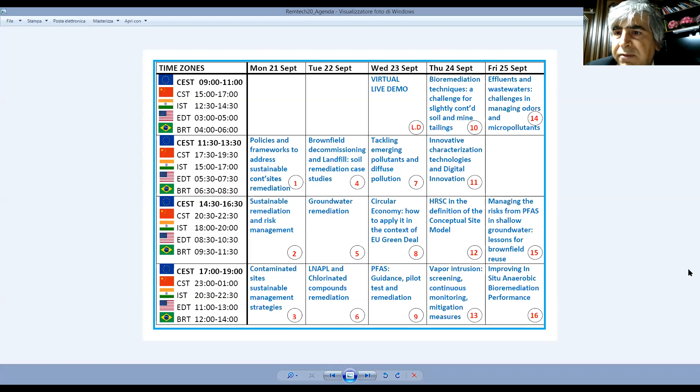Mute all, yes. Is it now muted? No, I still want to. Frank, you are mute too, you have to activate your microphone. Frank? Can you hear me now? Okay, okay, yes it's okay. Okay, I start over again.

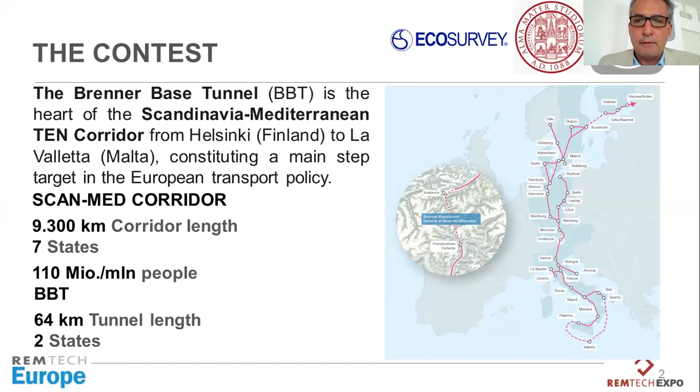The Brenner Base Tunnel is going to be the longest railway tunnel in the world with 64-kilometer length. It will connect Innsbruck in Austria with Fortezza in Italy, and is part of the Scandinavian-Mediterranean corridor, an important step of the European transport policy.

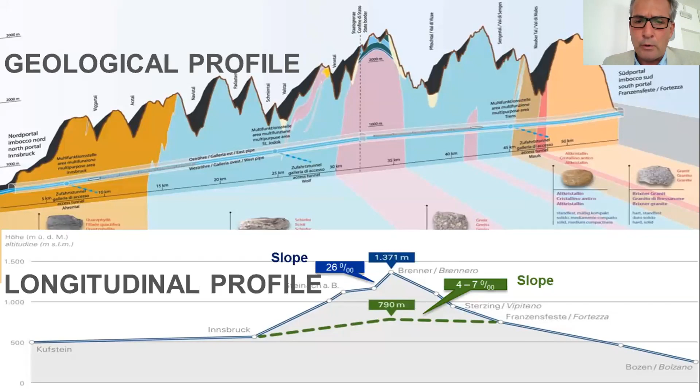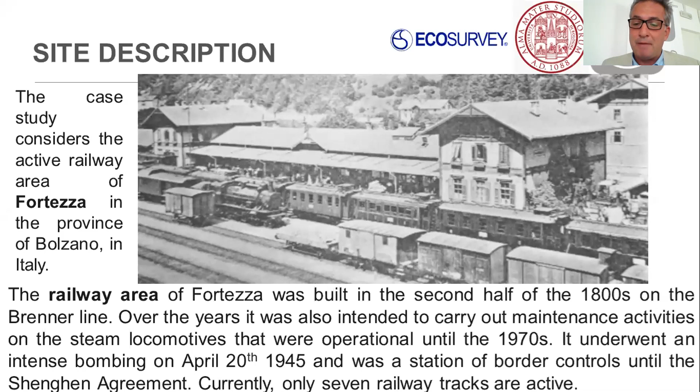We are going to speak about a project designed for the rail station of Fortezza, which is the southern point of this tunnel. This is an old railway station from the past century, used for border activities and the maintenance of steam locomotives. Our project is going to completely revamp this area to build new buildings and activities for the Brenner Base Tunnel.

This construction also included an underpass of the existing railway tracks. By demolishing existing old railway buildings, we found large quantities of waste, which is coal residues mixed with partially vitrified slag. This waste is very old, about 100 years, connected to former maintenance activities of the steam locomotives.

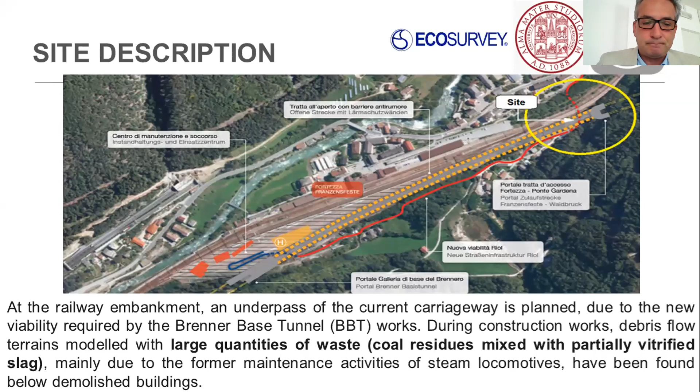Since the waste is so old, it does not fall under the actual regulation of waste in Italy. Therefore it can't be managed as an abandoned site, an illegal landfill, or a legal landfill. So we could choose between two hypotheses: soil remediation, meaning transferring everything to a landfill, or a permanent putting in safety of the site.

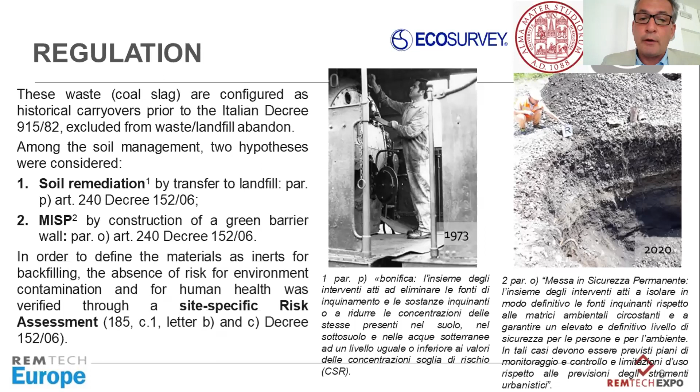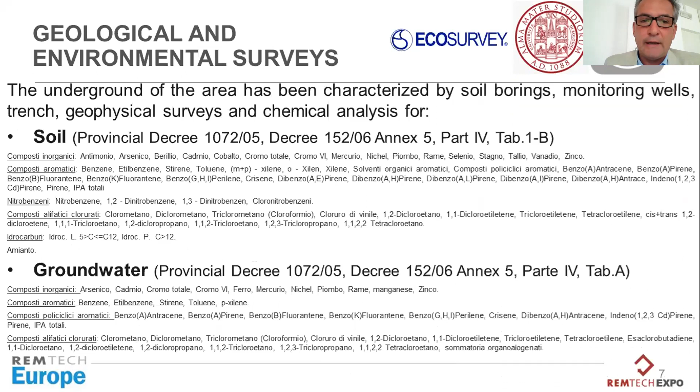To choose that, EcoSurvey conducted a site-specific risk assessment. Many surveys were carried out - geological, environmental, everything - to characterize the site. Soil and groundwater were investigated. Waste was characterized to understand which landfill was needed in case, and the area was also characterized by geotechnical and geophysical parameters. Geophysical surveys were executed because the hypothesis for putting in safety was the construction of a green barrier, a green wall, to separate the railway area from the village of Fortezza.

The investigation detected hydrocarbons, polycyclic aromatic hydrocarbons, and metals, but under the industrial limits. This is considered an industrial area since it's a railway area and not a residential area. Only antimony was exceeding the industrial limit.

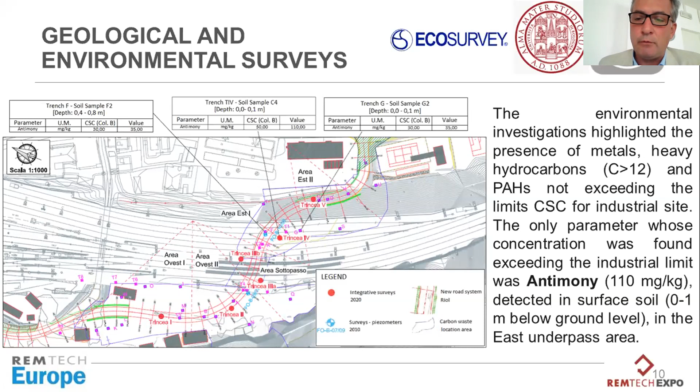In this investigation, we excavated many trenches and identified a layer of waste more than 5 meters thick. The waste was characterized as soil waste from demolition activities. This area is very extended, many thousands of cubic meters of waste, so it would have been very expensive to dispose of everything in a landfill.

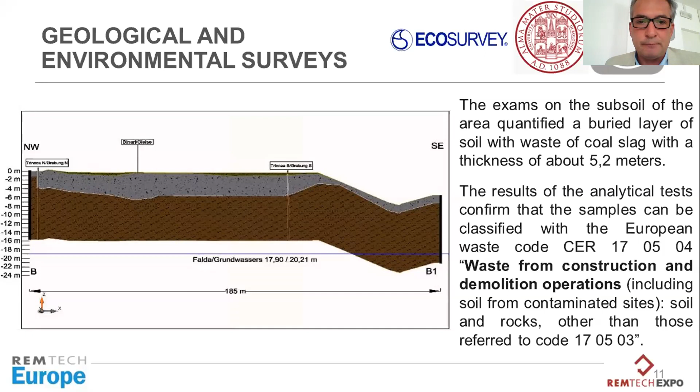The risk analysis identified as human targets the on-site workers of the railway area, and off-site the inhabitants of the residential area of Fortezza. Six active migration routes have been identified, and to define the size and extension of the contamination source, the worst case principle was applied, so the maximum value of the detected anomalies was taken.

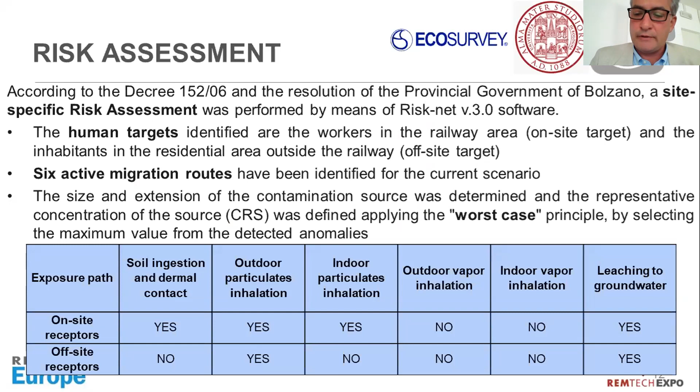Here we have the results, and the risk is acceptable both for the environment and for human life.

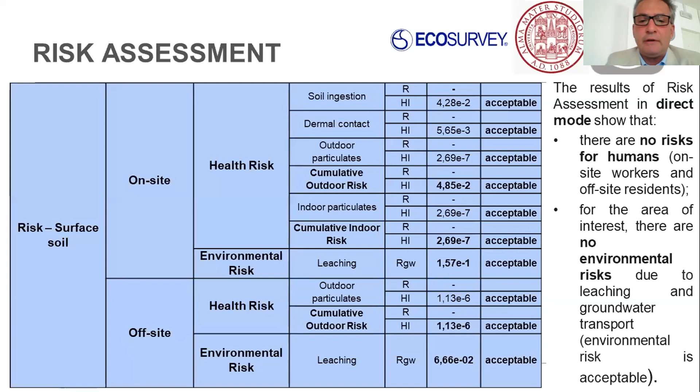And that was the direct mode of the risk assessment. Also, in the inverse mode, the evaluation is acceptable because the threshold concentration is higher than the representative source concentration. The remediation, therefore, was not necessary, and we designed a project with a permanent putting in safety of the site.

That means that the waste which is not excavated can remain at the site, and only the waste which is going to be excavated for the underpass has to be managed, and not landfilled. Instead, it can be reused at the site for refilling or for building this new green barrier.

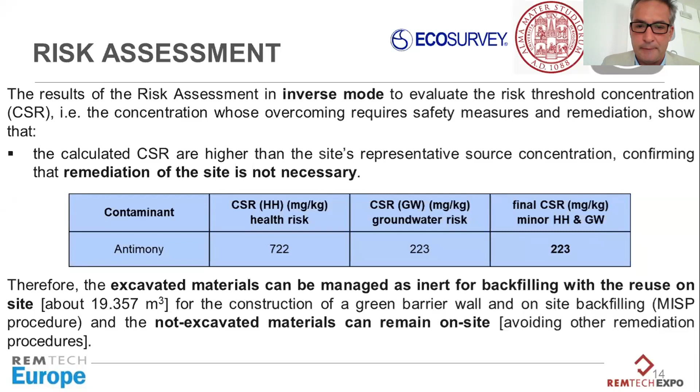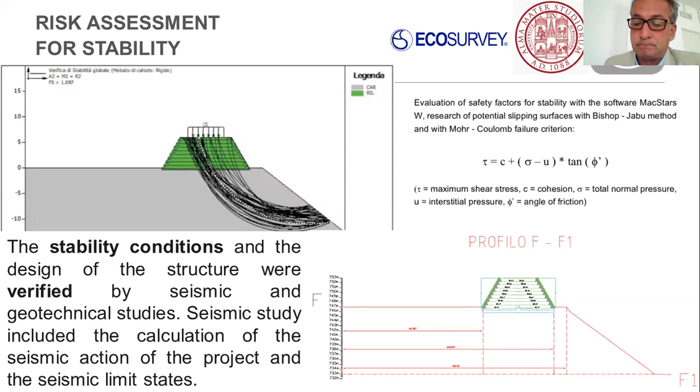The green barrier was designed with reinforced embankments, and all the stability conditions have been verified. Here you can see a photo of the actual situation and a rendering of the future situation with the entrance to the underpass, and above is this green barrier which is going to protect the village from the railway area.

And particularly is going to protect them from the noise of the train, which is one of the biggest problems of this area, and one of the reasons also why we are going to build the Brenner base tunnel.

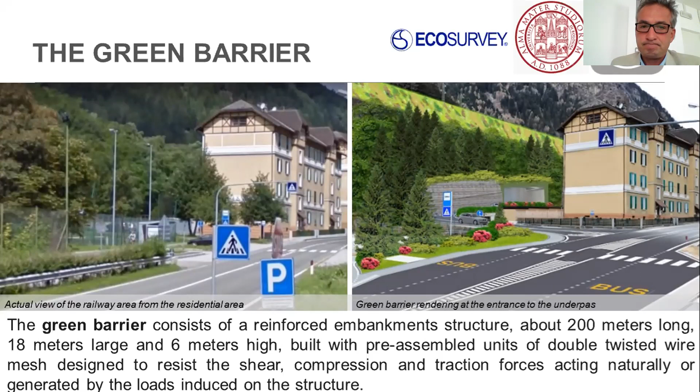The green barrier is 200 meters long and 6 meters high. It will be planted with plants and greened with big attention to biodiversity and to native plants, because we are in an alpine area, and therefore it's very important to include these aspects in this redevelopment project.

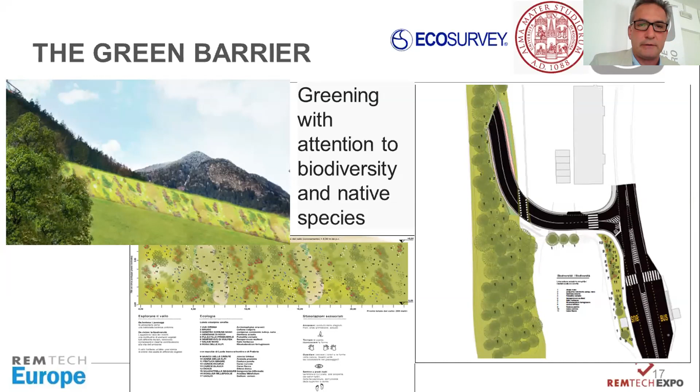So at the end, this choice led us to many benefits for economy, for the environment, and for the people living in this area. For the environment, the first thing is that we converted the waste into a valuable resource, because we are going to build this barrier with the waste.

We are going to save CO2 because for landfilling we had to transport all the waste by truck to a landfill, and also disturb all the citizens with this truck traffic. This is going to be completely avoided.

Then for the people, first of all, the reduction of noise is the most important thing. Also the visual impact is going to be improved. And moreover, at the top of this barrier, there will be a paved area available for the municipality to organize activities there. They have not yet decided what, but these are 2,000 square meters.

This will be reused. Then for the economy, we are going to save money, because landfilling this waste would have been very expensive. So we save public money, since this is a public investment, and 3 million is already something.

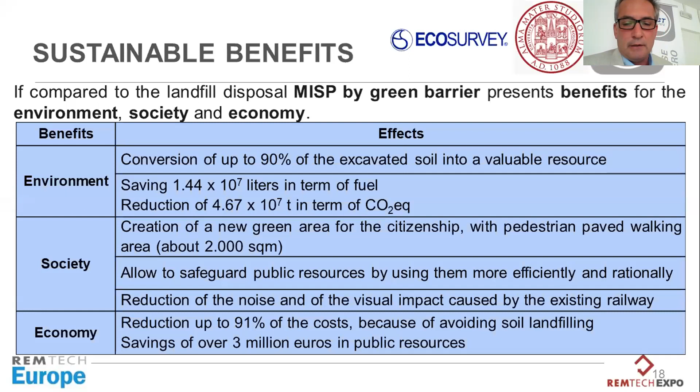So concluding, the risk assessment allowed us to decide on a redevelopment project which allows us to reuse this coal slag on site for refilling and for building a new green barrier. And this project was successful.

It's not yet realized, but it has been authorized. And as we always try to do with our projects, we shared this with the population and with the local authorities, and decided together the way to solve this problem.

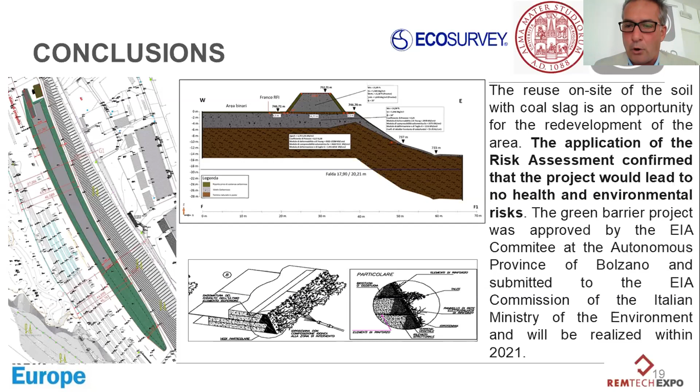It's also very important because the area is all full of this coal slag, and there will be future projects in the same area which will discover large amounts of this waste. So we already traced a smart solution to solve this problem on site.

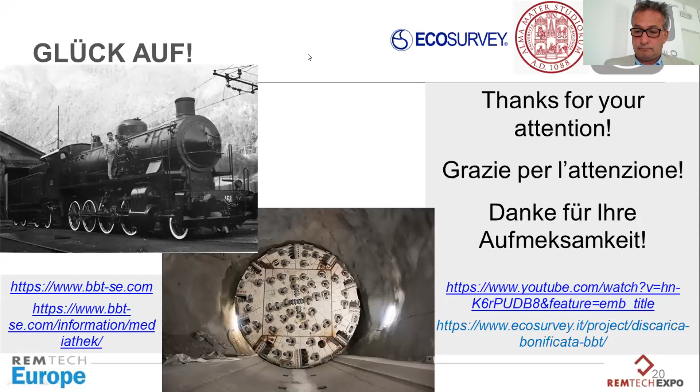Frank, your mic. Yeah, thank you very much, Hugo, for this excellent presentation. It seems a very sustainable solution to me, what you achieved.